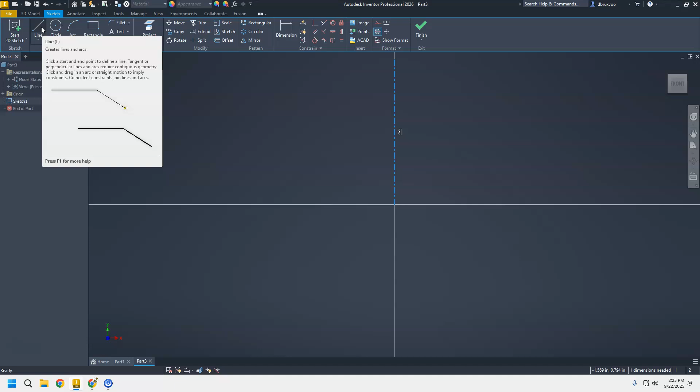Whenever we're using the revolve tool, what we're doing is drawing basically half of something, and revolve makes a round object off of that. So we're going to draw half of our circle. When we go over, we're just going to draw half of our part, not the whole part.

I'm going to go over, come up at a bit of an angle, click like so. We're going to go all the way up to the top, click over, go up, and stop when it hovers over the top line. But I'm not actually going to complete this part, and I'll show you why later. I'm not going to complete it all the way through, so we just have this basic shape.

The other thing I'm going to add to this is a circle. I'm going to click onto here and just draw a circle like so, and I'll get to that later.

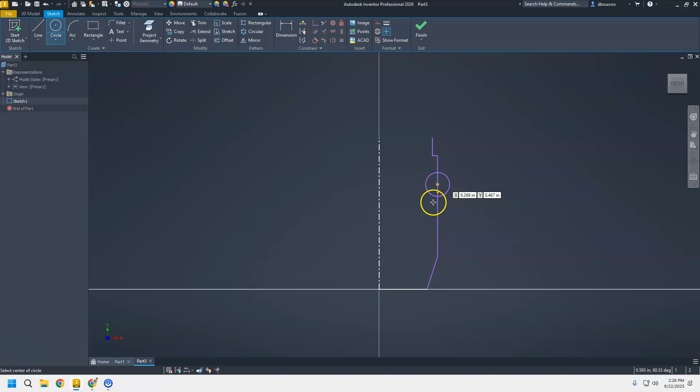Now let's start by dimensioning. First thing I want to do is make this 8 inches tall. So I'm going to go right to my center line and make it 8 — it's kind of annoying, didn't make it there. Click on that edge, click on that one right there. We'll make it 8, not 58 — 8 inches so that they are together.

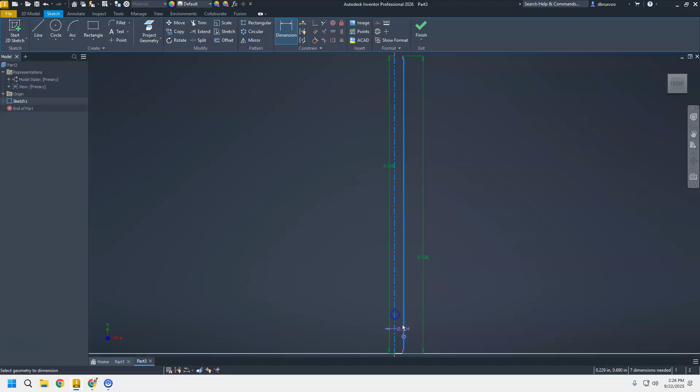So there's our part, the very first start of it. The next thing I'm going to do is click on my line here and bring it to the center line. I'm going to click, and you'll notice that when I bring it down — let me zoom out and get it correct here — it doesn't dimension the center line.

It goes all the way across and gives us the diameter symbol. This is a nice thing with center line — it knows it's the center, so if I'm going from here to the center, it knows it's going to be twice as big on the other side. So the diameter for this water bottle is going to be 3 inches. Go 3, boom, it makes it and moves everything over. Looks all nice and handy dandy there.

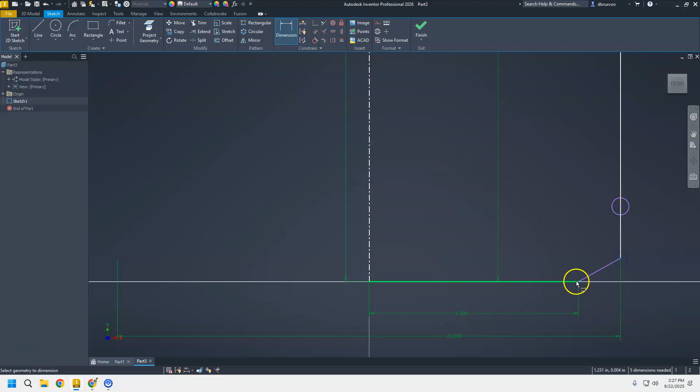So I kind of really screwed up on dimensions — this might be a little bit of following along you're going to have to do here. I'm going to come up here, we'll start at the bottom. I'll scoot this one over. This one right here is going to be 1.25. We'll do this angle — I want to click at this spot right here, click right there, and we'll make that 1 inch.

This circle, I'm going to click on the center point of the circle, and I'm going to click on the end of the line, okay? It's going to be way off right now.

But we're going to make this one, we'll say it's going to be 1 inch from the top, okay? 1 inch from the top. This right here is going to be a total of, we'll go 0.75 inches, okay? And then this line right here is going to be 0.5 inches, okay?

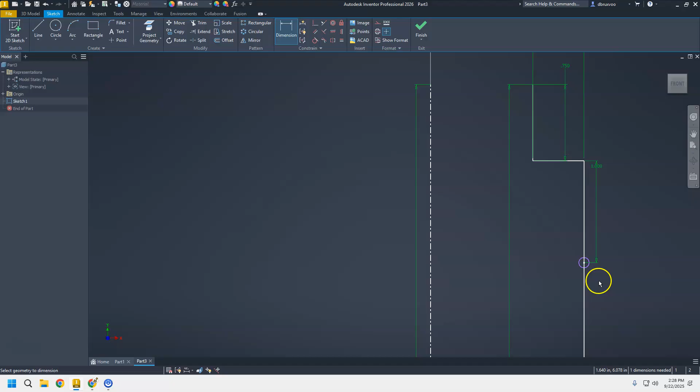Actually, let's even go a little bit less now. Let's go 0.325, okay? 0.5 there for the top, 1 inch down. And then let's make this circle 1.25 in diameter, okay?

Got that right there. And then we're going to go around here, and I'm going to do some trimming here. So I'm going to trim, okay? And it's going to make my water bottle like so.

And then I'm actually going to even make one more here. I'm going to take a line. I'm going to start up top. I'm going to draw it straight down like so. Hit escape. And then we're going to dimension this line. I'm going to go from the side over, and we're going to dimension that over 0.5, okay?

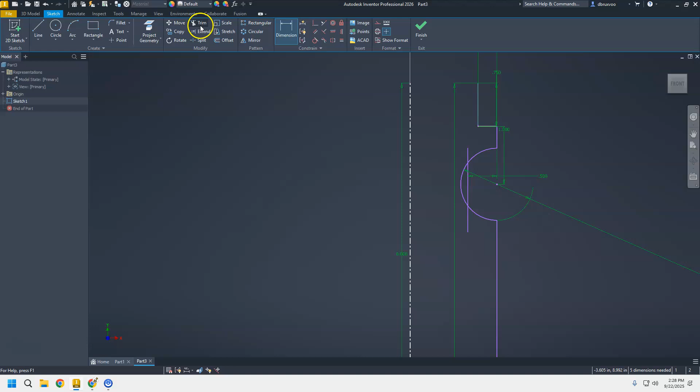And then we'll grab my trim tool again. I'm going to trim, okay? So we got kind of this funky little circle-y thing going on, but that's the basics, okay? That's going to give us the basic shape of our water bottle here, okay?

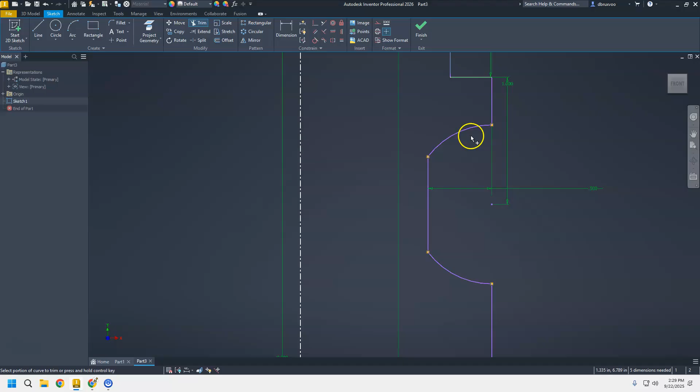Now the second thing I want to do for this drawing is I told you we're going to learn 2 tools. First, the revolve. We haven't quite gotten to that. We've just done the setup for the revolve tool. The second thing we want to do is we want to use the offset tool. And the offset tool is up here, offset right like so.

I'm going to click on offset, and I can click on a geometry, and you can see I can drag it out or in, and I can offset the part, okay? And for this one, I'm going to bring it in, and now this one's kind of weird.

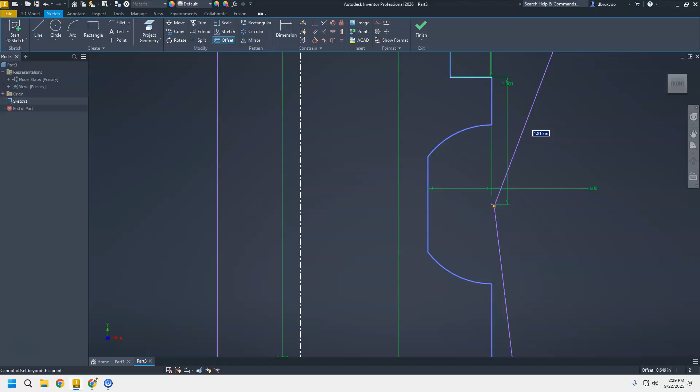It doesn't give you a nice offset text box or something. I kind of like how SolidWorks does it better, but I'm going to drag it in, and then I haven't hit anything. I'm going to type in 0.125, and then I'm going to hit enter, and it will lock it in 1/8 of an inch offset from the edge here, okay?

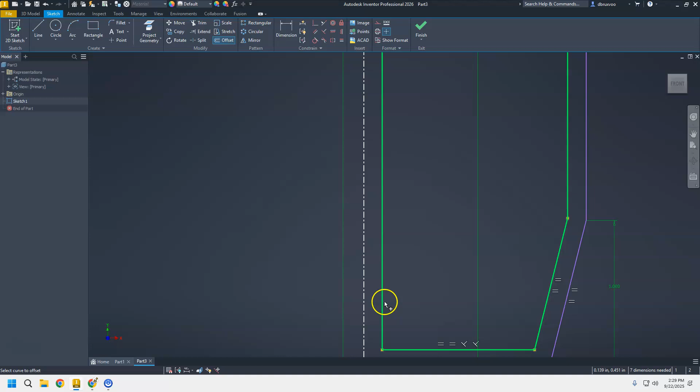And at this point, I need to do some more stuff. It also offset from the center line. I don't actually want the offset from the center line. In this case, I'm going to delete that line right there, hit escape from the offset tool, delete that, and then I'm going to lock some things in here just because it will make our part correct.

So I'm going to bring this line over. I can draw an extra line like I did there, or I could just click on the end of this line and drag it over. And then the other thing I'm going to do is I'm going to lock these two at the top together. I'm going to draw a line between our two parts, 1 and 2, okay? So at this point, we have a full feature made all the way around, okay?

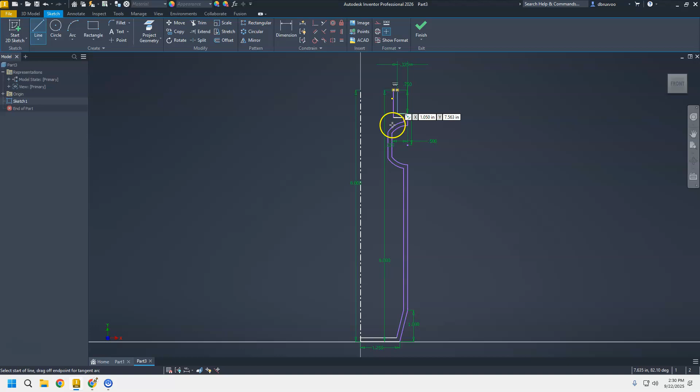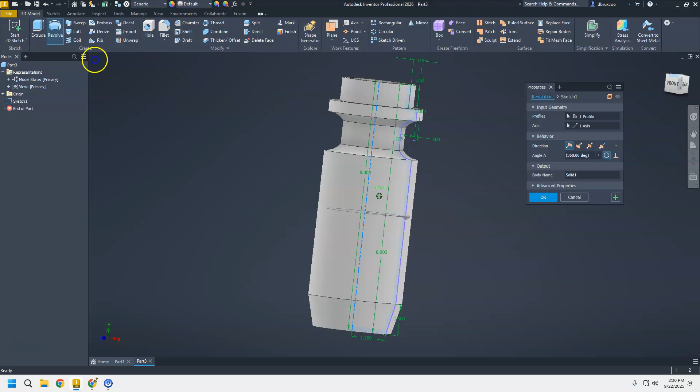Use offset. I'm going to hit finish, zoom back out here, okay? And then I'm going to go up to the Revolve tool, and automatically, it should do this correctly, it's going to select my profile, which my profile is sketch 1, and it's going to realize I have a center line here. It's going to make that center line my axis, okay?

And we can see that it made this water bottle exactly as it is. Inside's hollow. It's exactly an 1/8 inch thick all the way through. So it made this nice water bottle for us, okay? We hit OK, and we've got all of our geometry there.

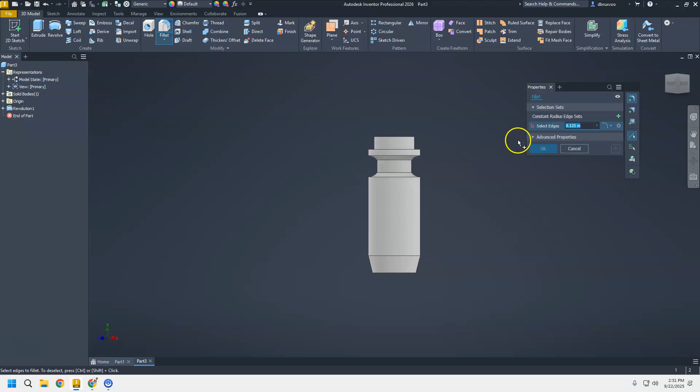Now this is a little bit clunky here, so just to keep practicing, we're going to make this look a little nicer here. We'll grab the fillet tool. We're going to do an 1/8 inch fillet on a couple things here. We're going to add an 1/8 inch fillet on that edge, 1/8 inch fillet on that edge, a little 1/8 inch fillet on that edge.

We'll hit OK, and it just makes everything look a little nicer, a little more rounded over. But there's our water bottle, okay? Just a simple revolved part and using the offset tool. Great for doing cylindrical features. Okay, let me know if you have any questions while you're drawing it.